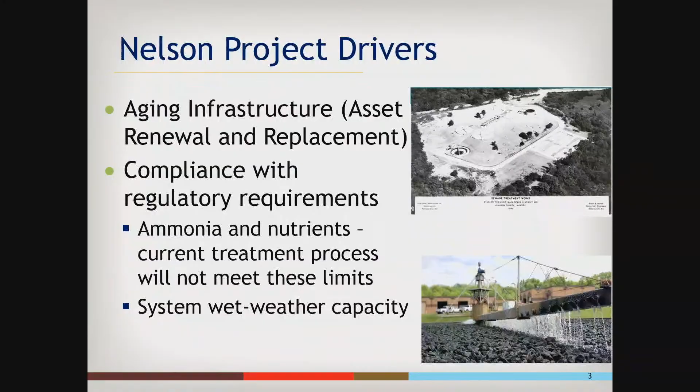Nelson's our oldest treatment facility and is at the end of its useful life. The existing technology will not meet the future water quality requirements and needs to be replaced. So the regulatory driver for this project, including the wet weather system capacity, was a key part of us developing our integrated plan. We entered into a consent order with the Kansas Department of Health and Environment, or KDHE, and that included our integrated plan as part of that consent order.

So a quick reminder of how Nelson fits into our integrated plan. Nelson's our next large treatment facility that follows the Tomahawk facility, and it was also one of the highest rated projects from a benefit score perspective in our integrated plan. We need to move forward with Nelson because it's a key initial project in the plan and allows for future system capacity enhancements to be made.

Nelson is one of the many important projects or programs that we're implementing as part of this long-term plan so that we can make sure we take care of the assets that we have, improve system capacity, and also allow for growth and development within our community.

Next slide, please. So these are the rate projections from our budget discussion this summer. As a reminder, our rate projections include both our capital and our operating costs. We're projecting 5% average rate increases over the next 10 years. And as you can see, you're probably familiar with the graph in the upper right-hand corner from the budget discussions, we're the second lowest rates in the metropolitan area, and proud of that.

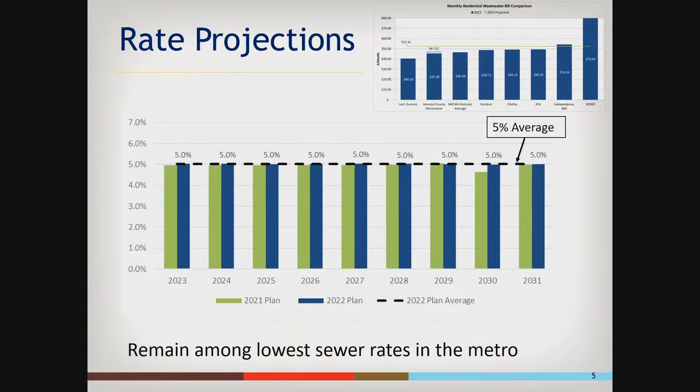So this is being accomplished by a few things. From the operating budget perspective, the Tomahawk facility and project removed a large portion of the operating cost from that Kansas City, Missouri cost impact. And then the planned state line pump station and force main project will further reduce those operating costs.

From a capital budget perspective, the integrated plan has allowed us to develop a long-term capital spend that will take care of the assets that we have in an affordable way, and also allows us to include these larger plant improvement projects such as Tomahawk, Nelson now, and in the future we have Mill Creek and Blue River.

Switching back to focus on Nelson, I wanted to remind you why we selected the construction manager at risk, or CMAR, delivery method. McCarthy Building Company was selected as our CMAR. The project presents challenges from the perspective of building a new facility while we continue to treat flows, so phasing is an important piece we needed to look at. Collaboration is needed from all team members, so the CMAR, the Black & Veatch engineering team, as well as JCW staff.

Currently, McCarthy has about 20 people housed at the Nelson facility so that we can facilitate that conversation and project understanding, talking through value engineering and constructability. We'll talk more about that in just a minute. And then also the delivery of a guaranteed maximum price package.

With Tomahawk, as you recall, we had one guaranteed maximum price package. And obviously you know we've been here multiple times for packages so far on the Nelson project. So today we want to talk through the strategy behind having those multiple packages.

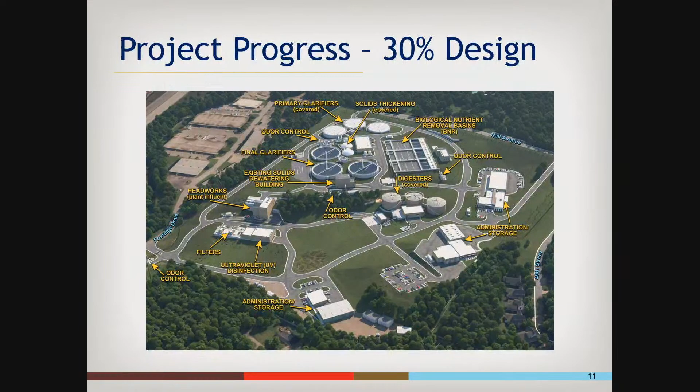We've placed our administration facilities along the south of the plant—some existing, some new—to give a buffer between the unit processes and the residences. I'll point out a few more specifics on this. We've got a flyover video at the end, and I'll talk to that as the video plays.

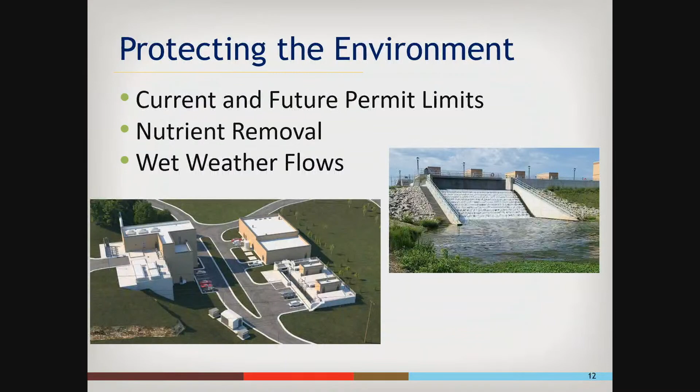So again, the goals of the project: protecting the environment. This facility will be able to meet current and future permit limits, including nutrient removal—constituents like ammonia, nitrogen, and phosphorus that the state is requiring. As Aaron mentioned, it's the first step in our wet weather flow reduction plan for the Nelson area. A key driver of the integrated plan was elimination of the peak excess flow treatment facilities, and Nelson will be built to take a lot of the initial flow when those facilities are eliminated. Here we're showing two facilities that will be sized to handle future wet weather flows when they're brought to the plant.

We are definitely taking into account the feedback we're getting from the community. We have a project website, jcwnelson.com, where we're keeping the public up to date on the project, and all the information from those open houses is there as well. We also continue to coordinate this project with the cities of Mission and Roeland Park, which is right next door, and are taking into account their CIP projects and other things. We're currently going through the preliminary development plan with the city of Mission.

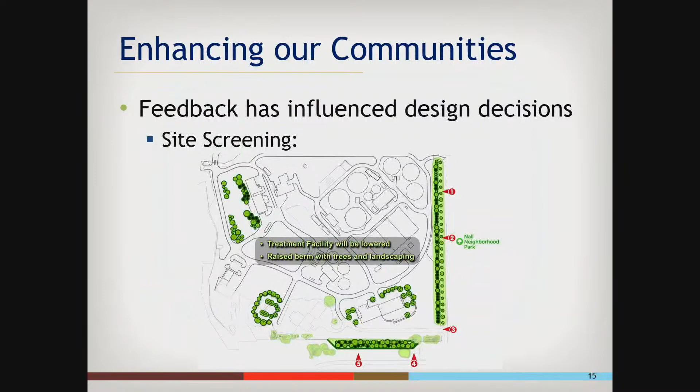That will provide some screening to the facility that doesn't exist there right now. You're going to have wrought iron? A wrought iron fence? It'll be like the iron fence in front of Tomahawk, for example. It'll probably be aluminum, actually, just the motif of the iron, because real wrought iron is expensive. That's been a huge issue for Mission and Roeland Park, to have something better than the green barriers other waste facilities have.

So that green space will be in front of the fence, correct? Yeah, the fence will be in front of the trees, I believe, is the impact we get. But they'll blend in together, so it won't look like a prison. Right, so it won't be chain link with barbed wire, and that's what's there now.

Aluminum. We also met with Roeland Park and Mission to get input on the berm, the trees, and the fence. We also met with the sheriff's office and their physical security specialists to understand their preferences on that as well. Okay, continue please.

I'm going to turn it over to BJ to talk about the construction environment. You can see here at the bottom left, that's when we submitted the original budget at 472 — that was early July of '21. And you can see that over that period of time to today, we've seen a 27% increase in the market due to escalation.

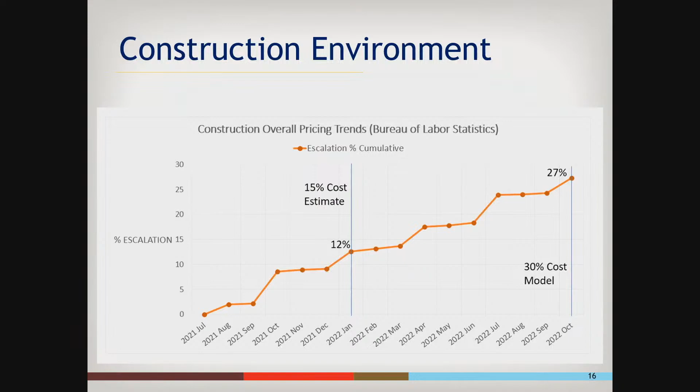Thanks, BJ. As Aaron mentioned, we brought McCarthy on pretty early, and they were able to get us a 15% cost model fairly quickly to see where we were at. So the team could dig in right away to figure out how to offset some of these overages. The first thing the team did was start working on value engineering items — I'll talk more about what that means in a moment, but just the numbers: the team was able to reduce the project cost by $40 million through value engineering efforts.

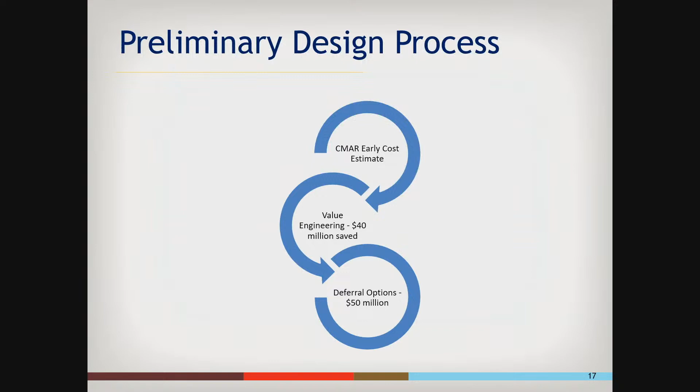We also identified items that we can defer to the future in our integrated plan. The team identified $50 million of projects that can be deferred to a later date. I'll talk more about what those mean now.

So if we value engineered something, there's no future expenditure, right? The team found a better way to achieve the same thing — like rearranging the site to save piping costs so the pipes got shorter, for example. That's value engineering, with no future expenditure. A deferral is a future project. So we identified $50 million that we could defer — for instance, pump station or offsite force main work, where we found a way to modify the design and be able to defer that.

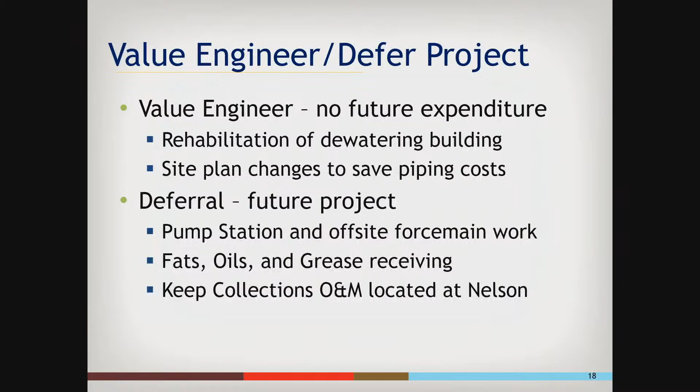We're planning on deferring our fats, oils, and grease receiving. And we're also keeping our collections O&M staff located at the Nelson facility. One thing that — well, I'll get to that in a minute.

So I would call it the project, because some of the things that have been deferred are projects that we had brought into that 574 for the WIFIA loan, to take advantage of the financing and the interest rates. The one thing I want to take you back to is the integrated plan — the framework of the integrated plan is the adaptive management piece. So while we will have to do those projects at some point in the future, the integrated plan allows us to optimize our plan so that it's a cost we'll have to incur in the future, but we can — that's what Aaron's team is doing, and he can explain a little better — we're working that into the plan so that we can adapt and not impact rates.

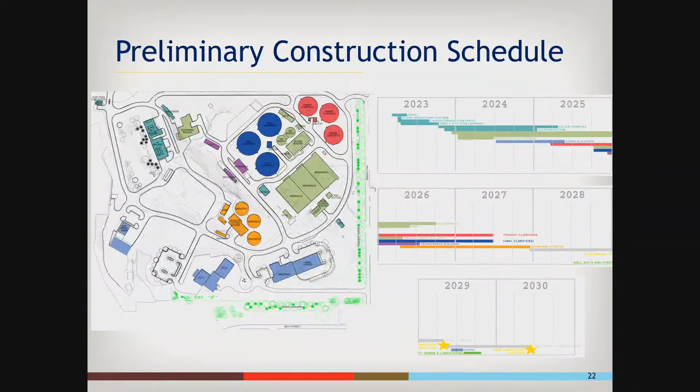I spoke to the different phases. You can see here that this highlights the different areas we can get into. What's unique about this project is we've got to keep 2 of the plants running during the entire construction phase. It's like open heart surgery, and every single line needs to be accounted for, making sure we keep it online so the plant maintains permit and continues to treat the flows. The mobilizations and sequencing are important for us to communicate to the bidding community that we have a plan and can execute on it.

So I heard technically challenging earlier, and I heard beast. This is a very complex project.

So next steps here, just hitting on it a bit. BJ mentioned the 7 phases. What we're doing with the GMPs, you've seen 2 so far, you'll see GMP 3 next week. What we're trying to do with GMPs is tackle the components we can tackle now, clearing the way for bigger construction components of the project. It's staging, getting pieces done that we can get done. The ultimate goal with the GMP approach is to shorten the duration of construction, because time is money, but also buy as much of the job as we can, knowing the escalation in the market is crazy and unpredictable. Hopefully that calms down, but we're not seeing that, as you saw from BJ's graph.

GMP3, I've got a graphic and 2 slides that shows you what that's about, but it's really site prep. It's the first package that's on the site. GMP1 was procurement of pipe material. GMP2 was the installation of the force main on Foxridge. GMP3, we're now starting on the site. We're going to basically clear out the entrance, create contractor parking, staging some of that space, and creating space that we can utilize that's currently not there.

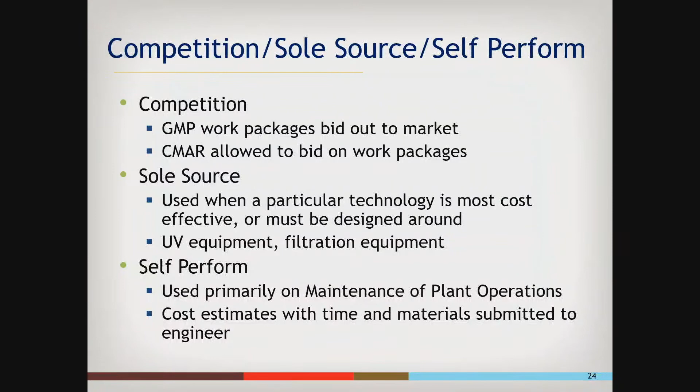For the filtration equipment, there's basically a single supplier. So we're following the path we made on the Tomahawk project, and we're using the same technology there. That's sole source for the most part. There are a couple others, but the UV equipment and filtration are coming up on GMP4.

And then self-perform. We've talked about the complexity and the beast of the project. Being able to communicate the maintenance of plant operations to the bidding market, and the complexity of the open heart surgery that BJ mentioned, is very challenging. So as a team, we've decided it's in the best interest to have McCarthy do the maintenance of plant operations work throughout. As they do that work, the engineering team is looking at those particular work items—I think we're at 32 MOPOs now, or maybe 35.

As those enter into construction, we've got representatives out in the field, our resident project engineers. They do inspection work and make sure everything is being built per the drawings and specs. We'll use those resources to track those MOPOs at time and material cost. So that covers self-perform.

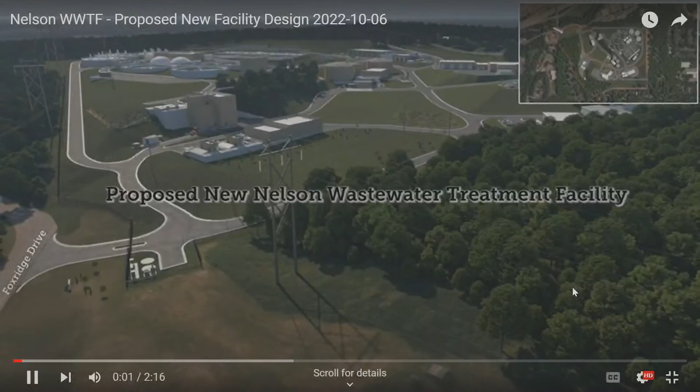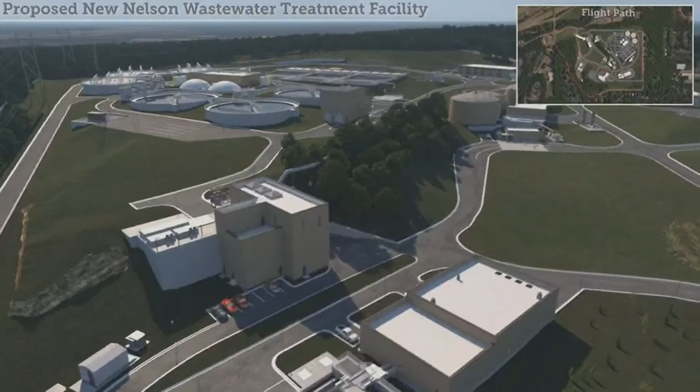So we're going to start the video coming in off of Foxridge Drive, which is the main entrance, and it'll be the construction entrance for the project as well. The two facilities that you see right there, the Headworks is on the left. The facilities on the right are the filters and the disinfection facility, and that's part of the pad that we're making in GMP 3 to be able to accelerate that schedule by 8 months, like we talked about earlier.

The building that's got that big stair step in it, that's a dewatering building. That's existing. We actually found a way to reuse that on site. That saved us about $7 million by the design team figuring out a way to reuse it. That's going to set the architectural motif of the site because that's a big building and it's blonde brick. So the rest is going to be blonde brick too.

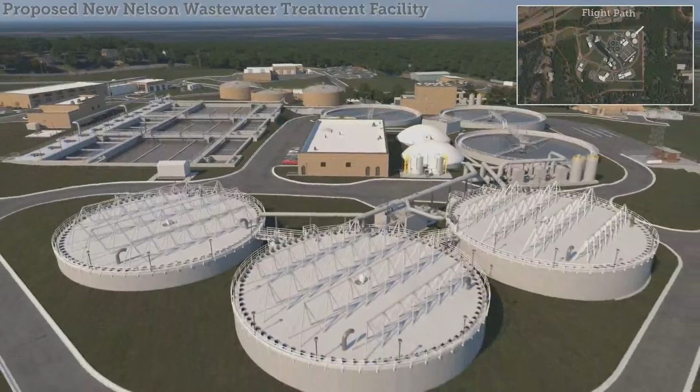You see the biological nutrient removal basins there. That's the new technology replacing those trickling filters that are now all over the site, as well as the final clarifiers, which are the cleaner water, uncovered, and the primary clarifiers are the circles that are covered. That's the more raw wastewater.

Now we're going along Nall Avenue. This is about 6 feet above, and we've got the berms and the trees, and you can see the fence there as well. Now, we realize that this is right after construction, so the trees are very small, and it doesn't look like they're providing great screening yet. They'll fill in, but that was one of the advantages of doing this rendering is we'll augment this with shrubs and grasses and things now that we can kind of see how it's going to look.

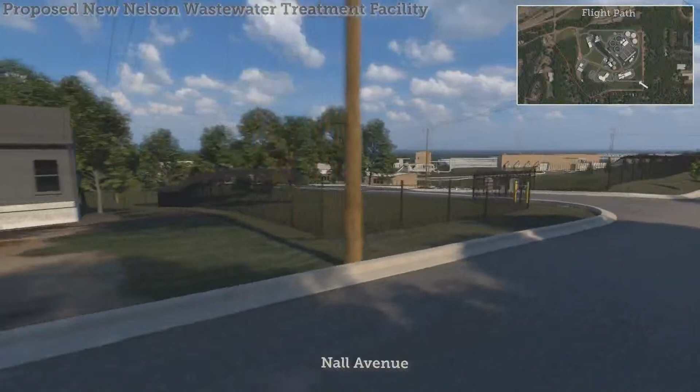We're going to turn the corner now to 49th Street where the residences are. There is a resident on the corner. Is your house? Yeah, that's right. And then we have kind of the same approach here. We'll have a berm with fencing and trees on top of that.

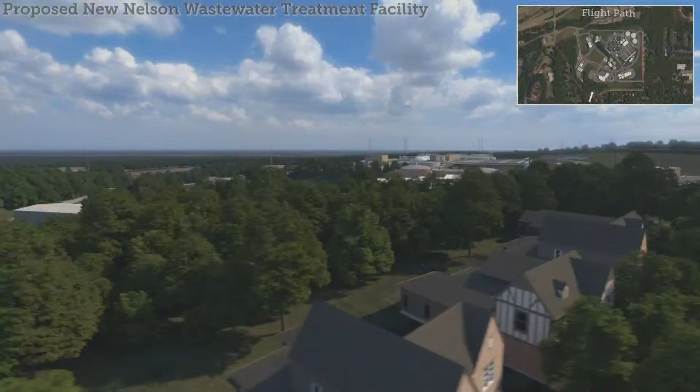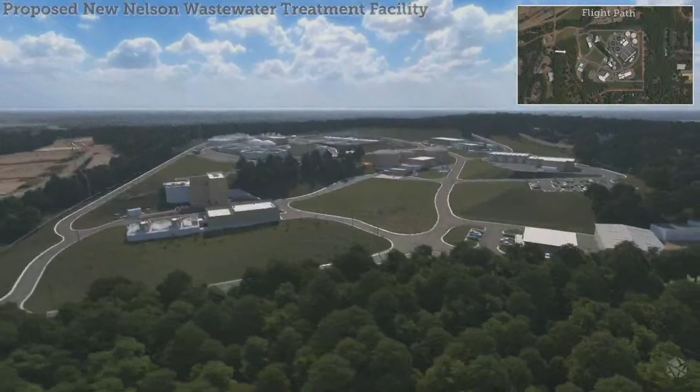And then it's going to kind of zoom out for a dramatic effect here. And that's kind of the facility. So you can see the green space between the wastewater processes there and the residents. That'll be a good enhancement to the community.

That concludes our presentation. Well, a lot of information and obviously a lot of hard work. And I want to say thank you to McCarthy and Black and Veatch.

The experience that we had at Tomahawk Creek was significantly different than what is going to be required at Nelson, where we were able to shut down the flow to Tomahawk Creek and send it on to Kansas City, Missouri for the reconstruction period. In this particular case, as you've indicated, flow needs to continue to be treated. And I'm not an engineer, don't profess to even know anything about it, but I would not want to be in charge of this significant project because of the challenges that are going to occur.

And I think it's also worth remembering for those who might be listening is that Johnson County wastewater is not supported by tax revenue, neither property tax nor sales tax. It is supported as a utility would be by the customers who use the service. And in Johnson County, Spring Hill, Gardner Edgerton, DeSoto, and some western parts of Olathe are served by their own wastewater district, so if you live in those areas, this does not impact your wastewater bill. But for all of the rest of us who live in the wastewater system, this would be paid for by the users in their annual or monthly bills that come. Again, no property tax, no sales tax.

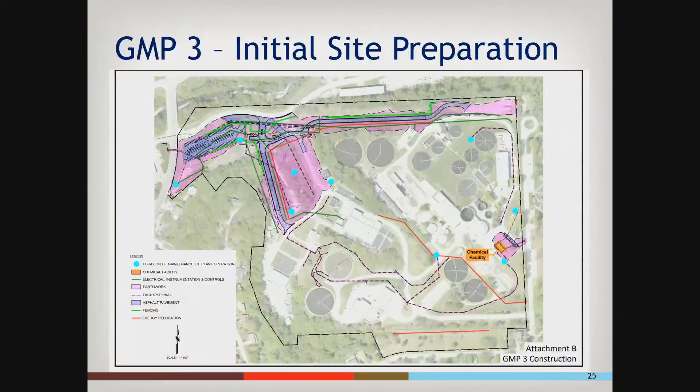The question I have is, I see on the map on page 25 it says Evergy relocation. I know with Tomahawk that was a big deal, having the power plant on site. Is that the same kind of thing we're planning here at Nelson? I didn't know what that meant, the Evergy relocation.

Yeah, so these Evergy relocations are mostly some lines we need them to bury so they don't cause issues with construction and traffic movement, and then relocate and add some additional drops. Luckily for us, there's a substation just east of Roe Boulevard, so we'll just be getting power from there and don't have to build a substation on site. Okay, great, thank you, appreciate the explanation.

It brings to mind a program I saw last night on public TV, KTWU. I'm not saying it's applicable here, but the entire program was about towns in Kansas that had been highly prosperous and are now ghost towns—Oil Hill in Butler County, Minden in Butler County, Neosho Falls, Runnymede in Harper County. For various reasons they were successful, none related to the availability of sewers I would say, but you have to continue to move forward or you move backward as a community.

So thank you very much, appreciate it. And so an action item will be on December 8th then, is that right? Next week? That's correct. Okay, the next action item is December 8th, correct. Thank you very much. And our next meeting will begin at 4 p.m. in the lower level. So thank you all for your time.